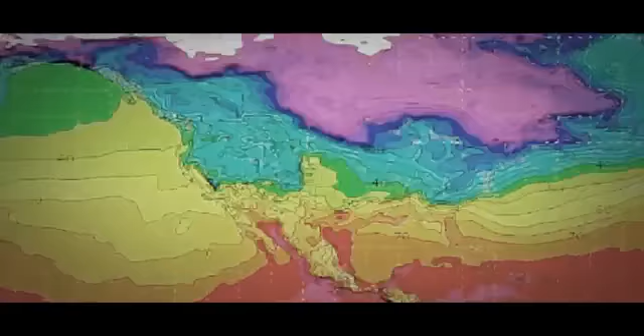In the real world, the answer to the question of can we see into the future has been answered with a resounding no. In our ever-evolving society, the trend today is to look toward the future by relying on predictive modeling to best predict the probability of an outcome. But we all know that even these well-thought-out predictions based on data often turn out to be not so predictable.

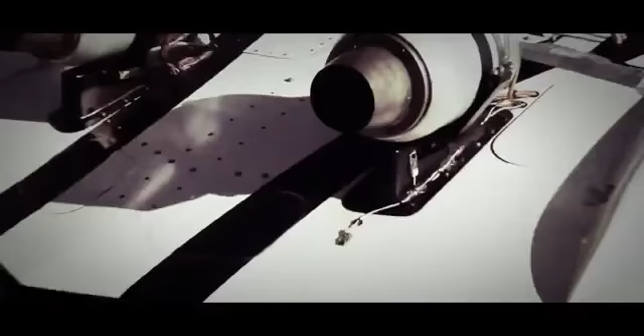Although it's clear that future events remain virtually unknowable, there is one group within NASA that comes as close as you can to seeing into the future. Throughout NASA's field centers, members of the Fixed Wing Project team are peering into the future every day and coming up with concepts that they believe will be on the next generation of aircraft. Because it takes years to plan and develop these concepts, the hardware and theories that are being tested today will be key components that enable the next generation of aircraft to take flight.

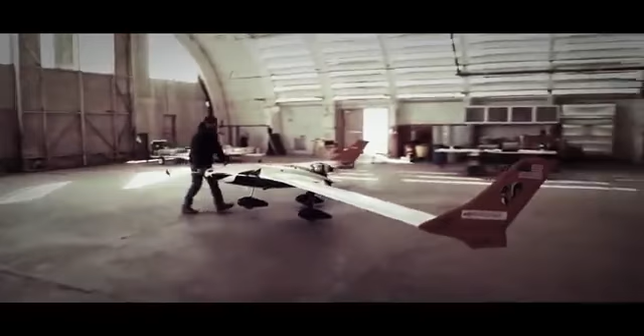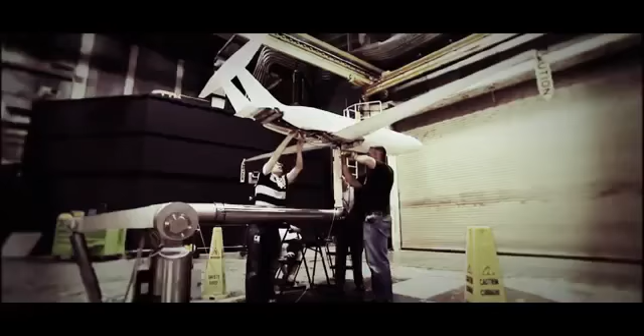On this episode of NASA X, follow us around the country as we visit members of the Fundamental Aeronautics Program's Fixed Wing Project, who are developing the framework that will shape how aircraft of the future will fly. Take a look behind the gates of NASA to see what some of these new ideas look like and how the engineers of NASA are paving the way for the ideas that will change the future of flight.

To the untrained eye, most of the aircraft of today look very similar. This is because over the past century of flight, aeronautical engineers have worked hard to optimize passenger aircraft to the point where they are as efficient and safe as possible. As a result, the basic tube and wing shape has been configured and examined from every possible angle, making it the most efficient design possible today.

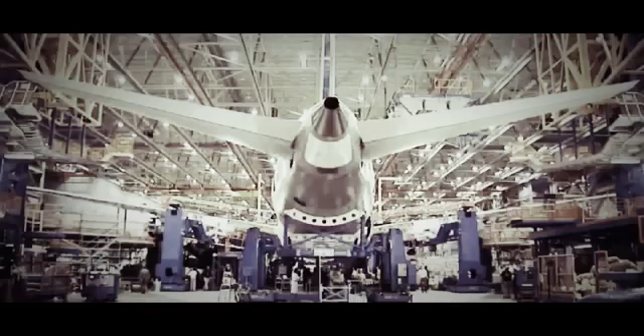Although aircraft have looked basically the same over the past few decades, if you look closely, you can see some of the major design changes. Wings that were once swept back more dramatically now are less so because of advances in aerodynamic shaping. Engines that spewed emissions by the ton are now much more efficient. Materials that were once so heavy that they significantly weighed down a craft are now much lighter and stronger.

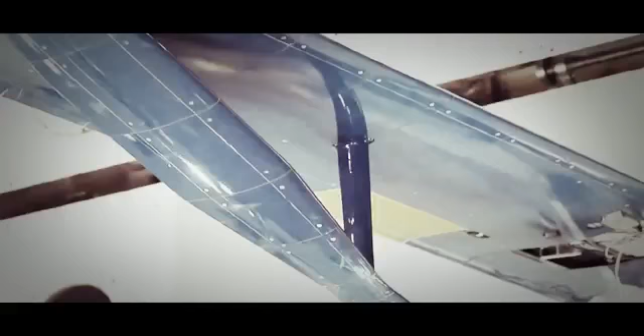With all this improvement and efficiency, it is fair to ask if there is anything else that can be done to make flight even better. The answer is of course yes. Behind the gates of NASA, there are scores of researchers who know that we can still make aircraft better because they are working toward these long-term goals every day. Some of these researchers from the Fixed Wing Project are working on so-called N+3 configurations and goals.

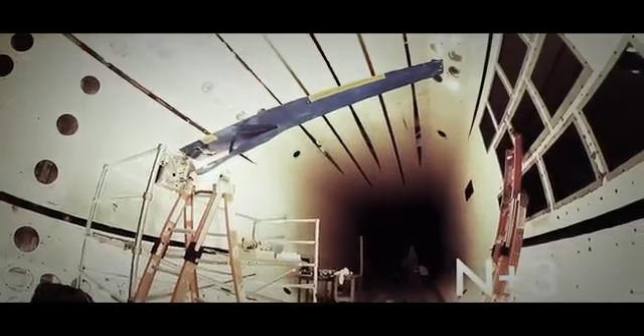In mathematical terms, the letter N is where you start now. N+1 is the next step. N+2 is just beyond that, and so on. Here in the Fixed Wing Project, N+3 equates to aircraft that will be flying in around the 2030-2035 timeframe. For this team, everything is on the table, including engines, fuels, wings, and fuselage shapes.

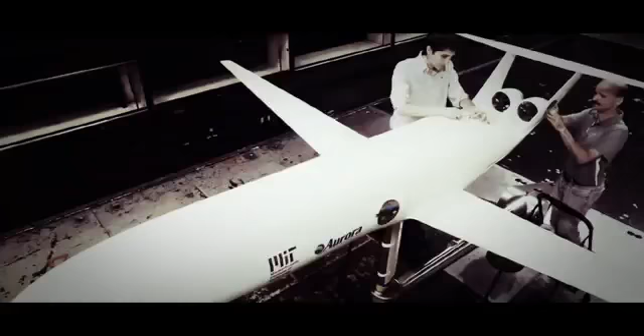Well, we need to remember the first A in NASA is aeronautics. So it's the National Aeronautics and Space Administration. Aeronautics is the field of research for airplanes. The airplanes that fly today were researched and experimented with within NASA many years ago. So we're trying to continue that tradition, that important work that we have done for the nation and the world, for 20, 30 years from now.

Fixed Wing is a NASA research program where we are doing activities to try to improve the airplanes that we're going to be flying in the future. We're trying to make them less noisy. We're trying to make them better for the environment. We're trying to make them in a fashion that they will use less fuel.

The research we're doing is important because air travel is such an important part of your life. People travel; even if you don't travel, cargo gets carried every single day. You use something every single day that gets carried by an aircraft. It's part of our way of life these days, and it often gets taken for granted. There are challenges though, so we are focused on exploring and developing technologies and concepts to improve the energy efficiency and environmental compatibility of transport aircraft.

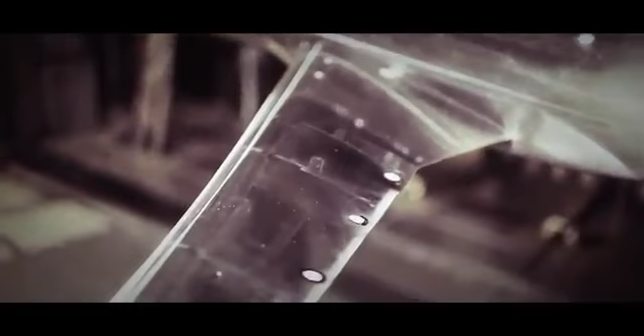With this mandate to significantly lower noise and emissions and increase performance for subsonic aircraft, there will be a need to address virtually every aspect of the current aircraft configuration, including developing new materials and engines, testing alternative fuels, and even changing the fundamental shape of the aircraft. All across the country, fixed-wing researchers are doing just that. Major advancements are being made into the understanding of how future aircraft will fly.

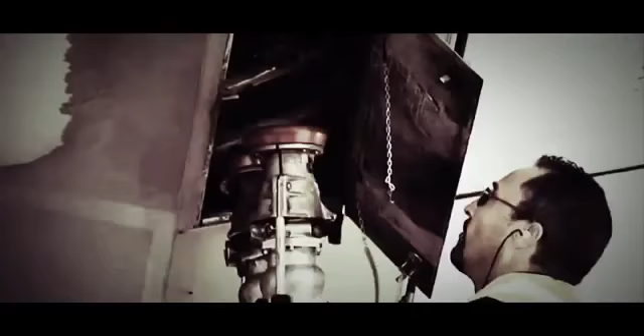Because there are so many areas of study, let's first look at something that has the potential to be used today as well as in the 2030 timeframe: alternative fuels.

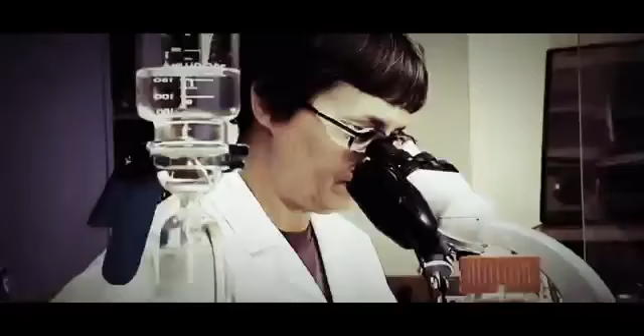On this beautiful morning at NASA Dryden in California's high desert, a test called ACCESS, or the Alternative Fuel Effects on Contrails and Cruise Emissions test, was performed to study the effects of alternate biofuel on engine performance, emissions, and aircraft-generated contrails at altitude. For this test, 2 aircraft were flown in tandem. The first is NASA's DC-8, which will be burning an alternative fuel.

The second aircraft is NASA's Falcon that will fly directly behind the DC-8 to measure and characterize the emissions coming out of the engines from the alternative fuel. Here is NASA's Bruce Anderson to explain. NASA's role is in assessing the combustion characteristics of alternative fuels, as well as determining how these fuels will affect the performance and emissions from aircraft.

To understand how aircraft affect the climate, we need to make measurements at cruise altitudes. So the focus of ACCESS, or the alternative fuel effects on contrails and cruise emissions, was to fly behind the DC-8 in flight and look at its emission and contrail characteristics as we changed from standard jet fuel to a fuel that was a blend of a fuel that was made from camelina plant oil, and also added 50% of Jet A to that.

There are some other groups out there. Tyson Foods is making a biodiesel and biojet fuel from chicken fat that they sweep up on their processing plant floors. So there's a number of different ways of making these alternative fuels. All of them result in a fairly clean kerosene that doesn't have nearly the contaminants in it that the fuels from refineries do. The fundamental thing is the aircraft has to retain its performance characteristics when you burn a fuel.

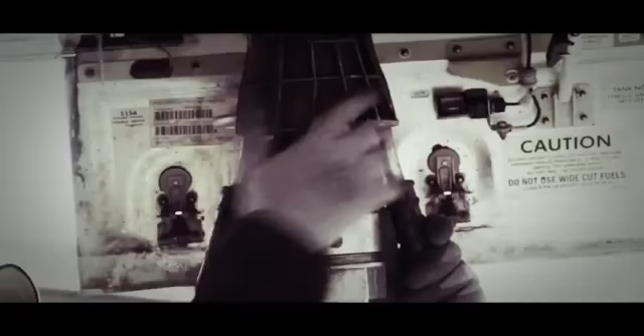You can't have any drop in power. The fuel also has to have similar characteristics in terms of density and volume to kerosene. So what we're looking at is drop-in fuels. A lot of the fuel systems on the aircraft are designed to rely on the aromatics in the fossil fuels to swell the seals to make them leak tight. So when we fly an alternative fuel, we have to mix it with standard fuel to retain those properties. Otherwise, the fuel would just leak out of the aircraft.

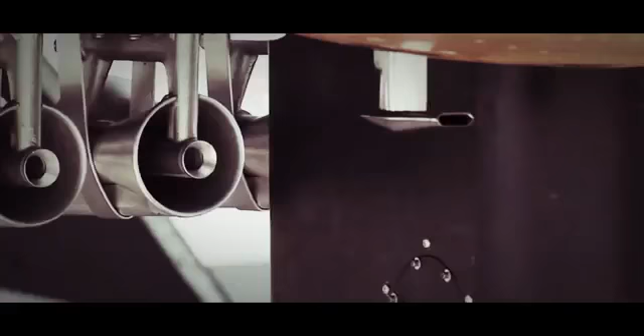And then the second thing we're looking at is just the emission characteristics. By that I mean the amount of pollutant generated per kilogram of fuel burn. After the first few flights, it was shown that using these types of alternative fuels could significantly reduce emissions at cruise altitudes, particularly soot emissions. Work continues to better understand how to use these fuels and how to make them even more efficient for future aircraft.

Other than alternative fuels, there are some other ideas out there for finding more efficient ways to power aircraft. If we look on our roads today, many of the cars that are now being driven run on a combination of fuel and electricity. The idea that aircraft could do this seemed far-fetched only a few short years ago, but today, this idea is gaining traction. There are several ideas on how to do this, so let's take a look at a few.

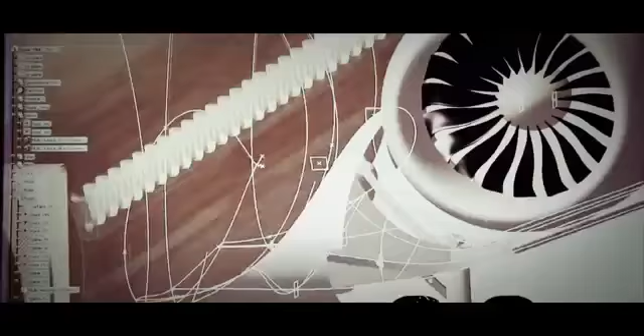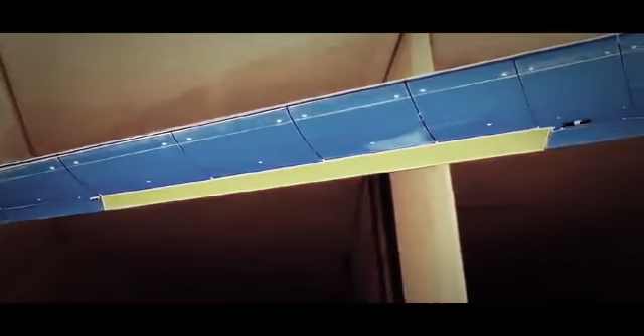Here, a team is looking over a new Boeing aircraft design called Sugar Volt. This unique design has several interesting changes, like the truss-braced wings that have the potential to reduce the drag of the wings by making them longer and thinner. Because thin, long wings have the tendency to flex more, designers have included a clever, efficient truss structure to support them. This design has the potential to reduce drag and weight, thereby making the craft more efficient to operate.

At first glance, those unique structural changes may look like the biggest game changer for this type of aircraft, but the Sugar concept holds another surprise as well. In the case of the Sugar concept, what's less obvious to the eye when you see it is that it has an unconventional propulsion system. It's a hybrid gas-electric concept that's closer to what you see in a Prius. It has batteries and a gas turbine engine technology.

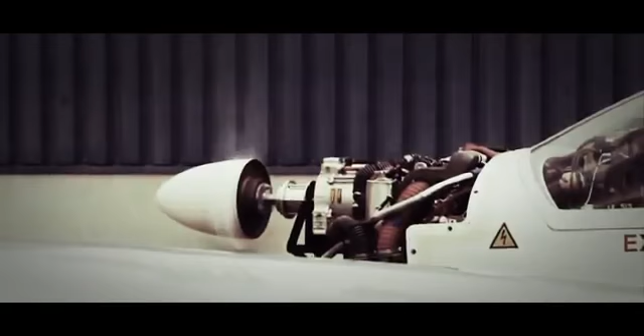It requires advances to battery technology, but those are happening throughout the world independent of the aerospace industry, and we're trying to leverage that. We do it on cars, we should be able to do it on airplanes eventually. The challenge is to take those batteries and have enough energy or power content and have them be lightweight. Where we are today, I think, is we're at the dawn of the age where we can start to see electric propulsion or hybrid electric propulsion.

And you'll see it on smaller aircraft first before you see it on the large commercial transports. But that's what we're working towards. It's good for cleanliness, it's good for noise, it's good for energy efficiency. It has its challenges. That's why we're working on it, and that's why it's not being done today.

The idea behind this vehicle is to have its twin engines burn fuel when great power is needed, like at takeoff. But when the craft is in a cruise configuration, a switch can be made over to a battery electric mode to supplement or even replace power to the engines. If successful, this could reduce the amount of fuel burn by up to 70%.

Another concept called turbo-electric propulsion is being studied here at the NASA Glenn Research Center. Here is NASA's Jerry Brown to explain. There's not been electric airplanes except in very small size. And the reason is that electric motors and generators tend to be too heavy for flight. We're hoping to change that, and we're hoping to get a benefit from saving a whole lot of fuel in the process. The type of electric propulsion that we're talking about today is turbo-electric propulsion.

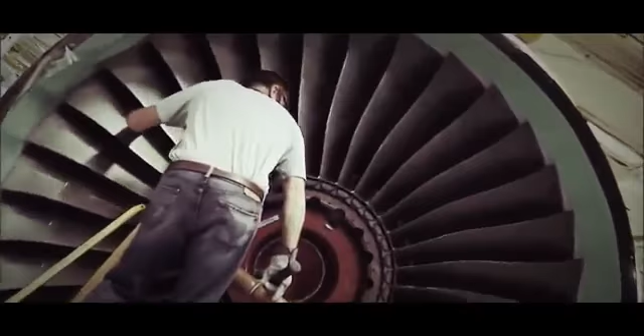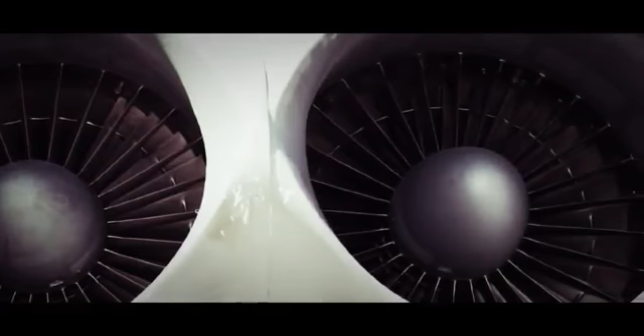What we want to do here is we want to be able to break the turbine engine from the fan, and that gives the aircraft designer a lot of freedom. If he can move the turbine engine somewhere else in the airplane, that may itself have advantages. The engine and the fans don't have to turn at the same speed. You don't even have to have the same number of fans. And that's what we're really looking for, is we want to have an array of a whole bunch of fans, maybe 15 of them, say, and just 2 engines. You like to keep just 2 big engines because the big engine is much more efficient.

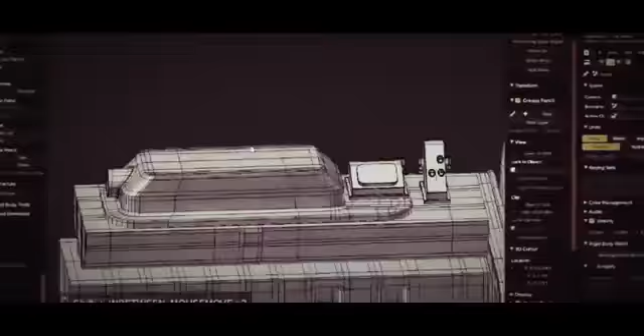This idea is intriguing, but big changes need to be made to make it viable. One major challenge is the need to reduce the size of the generators because the generators of today are way too big to fit on an aircraft. One idea that the NASA team is looking at is a way to remove the current type of copper windings in the generator and replace it with superconducting material. This change would allow the generators to shrink, making them viable to fit on future aircraft.

As we've seen so far, new aircraft designs are coming online that have the potential to greatly improve aircraft efficiency. Another of these revolutionary designs has come out of a joint MIT and NASA study. This unique design is called the double bubble and has the potential to reduce fuel burn by up to 70% as well. So the MIT D8 double bubble design was something that we've been working with MIT for a number of years on. The idea there is to take some of the lift that you would normally get from the wings and try and move that to the fuselage.

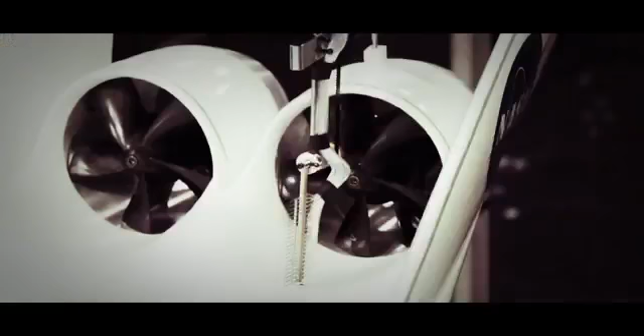So in order to capture all the detail you'd see on a vehicle like this, including what's going on inside the combustors of the engines and things like that, you need to have a lot of grid points to resolve all the fluid motion inside those engines, over the airplane, and having that many grid points to resolve all that physics in 3 dimensions creates very large computational grids that require very big machines to advance the equations that govern the fluid motion and get these CFD, computational fluid dynamics solutions that we use to make our assessments.

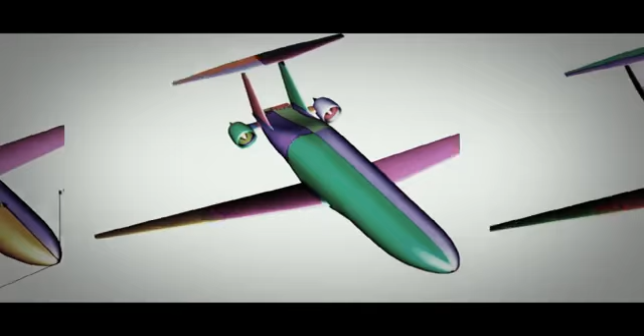Aerodynamicists of today are able to model ideas on computers, which allows them to test many different configurations before a wind tunnel model is ever built. Once a design is agreed upon, a wind tunnel model can then be fabricated and tested. This process was used for the double bubble as well, but the wind tunnel test showed surprising results.

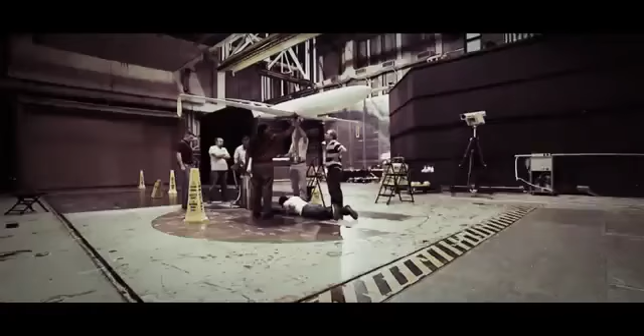The good news is that we've just completed the first test of this configuration in the Langley 14x22 wind tunnel at NASA Langley. And it showed even a greater reduction, or more fuel efficiency benefit to this technology than we had predicted on paper with our lower-order models. So we're trying to digest the experimental data that show this nice benefit in fuel efficiency from this configuration.

At the same time, we're also using the supercomputer here at NASA Ames, the Pleiades supercomputer, to do computational fluid dynamics, CFD runs of these same configurations and see if we can confirm that benefit on the computational side as well. Testing will continue on the double bubble, and if the results hold, you may see this type of aircraft at an airport near you in the future.

When testing aircraft, many different stages occur. We have already mentioned CFD and wind tunnel testing, but another tool in testing future designs is to build a flying scale model. Although CFD and wind tunnel modeling is the mainstay, often test flights of these small, scaled-down versions of an aircraft offer some of the most dramatic results for researchers. That is the case with this aircraft, called the X-56.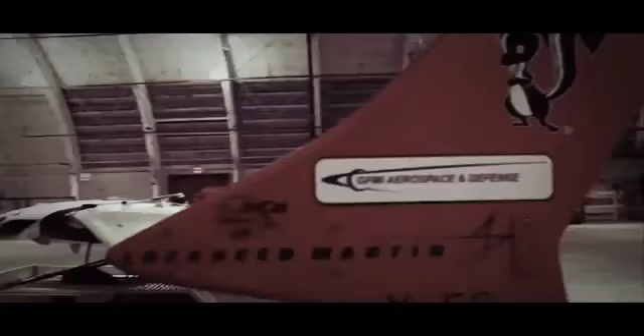This aircraft is being used as a test bed to understand how different wing configurations work and how a unique idea called active control may be used in the future. The whole concept behind the X-56 is that they've long known that a very long wingspan vehicle is more efficient than short wingspan vehicles.

Problem is though, when you get a very long wingspan, you start to get into issues with flutter modes that start to creep into the vehicle, so that the wing will go unstable and in extreme cases will rip off the vehicle. To get around that problem, you can use active flight controls to suppress those flutter modes.

Active control is you put things like accelerometers within the wing, and as soon as you sense that the wing is starting to get into these flutter modes, you use the control surfaces behind the wing to damp that out. So the airplane, as it's flying, is continually fighting these modes and keeping the wing straight and stiff. Then you can build a lighter, longer wingspan vehicle that is more efficient.

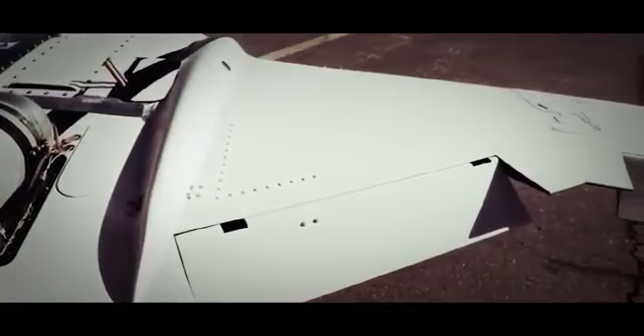This vehicle, as funded by the Air Force, was built as a multi-utility technology test bed. They call it the MUTT for short, and it is built to do a lot of different kinds of testing in aeronautics. The wings are removable. You can put on a stiff wing, you can put on a flex wing, you could do a joined wing configuration. We can learn quite a bit from testing this kind of vehicle. Right now, the focus is on flexible wing and active control of flexible wings, but in the future, there are many experiments that can be done with this vehicle.

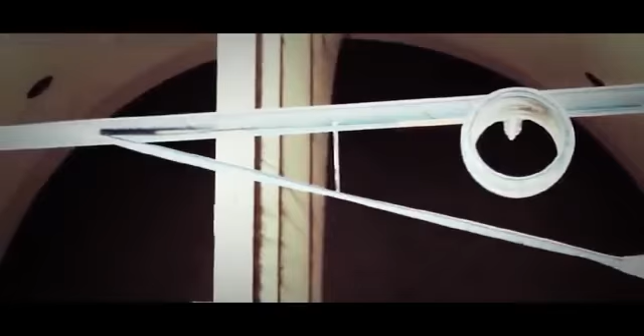The research on the control of lightweight, flexible wings being performed today on the X-56 is key to enabling the long, thin, low-drag, and low-weight wings of tomorrow's N+3 configurations.

Much is going into understanding what it will take to improve the already incredibly efficient aircraft of today into ultra-efficient vehicles of the future. Although we don't have all the answers yet, it's clear that NASA and its brilliant engineers and researchers are helping to lead the way to a safer and more efficient way to travel.

We are nowhere near the maximum that we can get out of this industry. And there is a lot of work to do, and that's what my team is doing. That's what we're doing within NASA, and I cannot wait for the future.